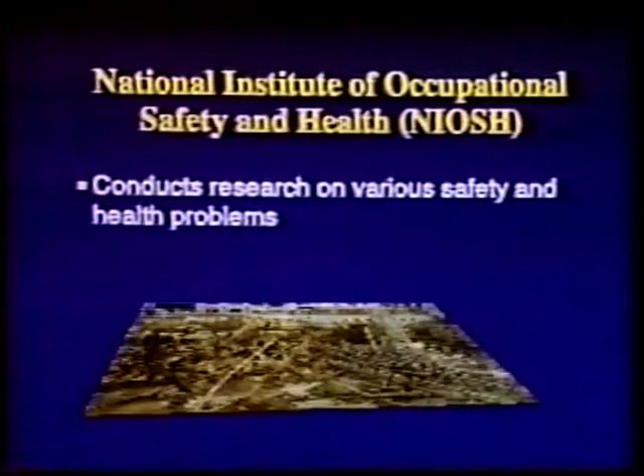The National Institute of Occupational Safety and Health, NIOSH, conducts research on various safety and health problems, provides technical assistance to OSHA, and recommends standards for OSHA's adoption.

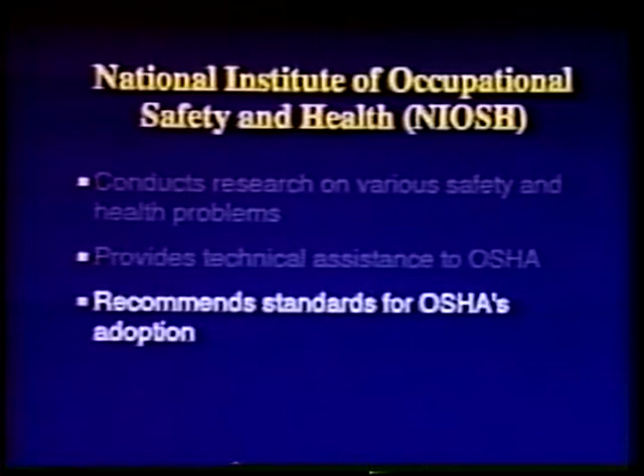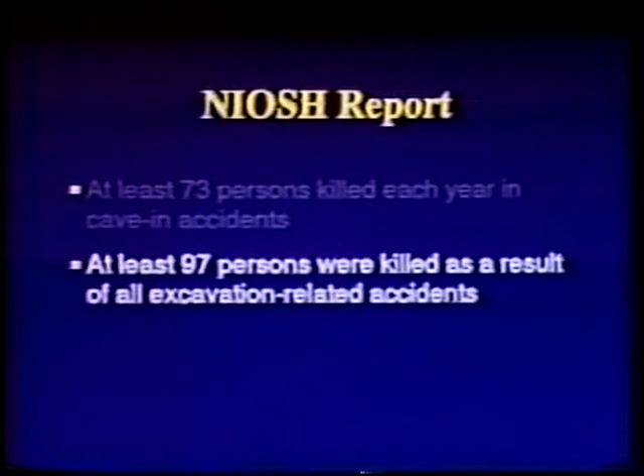In a recent report prepared by NIOSH based on OSHA's inspection data, it was estimated that at least 73 persons were killed each year in cave-in accidents, and at least 97 persons were killed as a result of all excavation-related accidents. This program presents an overview of OSHA's requirements for protection of employees in excavations.

OSHA's excavation standard is contained in its Code of Federal Regulations for the Construction Industry, 29 CFR, Part 1926. The standards found in Subpart P consist of 3 sections.

Section 1926-650 contains the scope, application, and definitions applicable to Subpart P. Section 1926-651 contains general requirements, and Section 1926-652 contains requirements for protective systems. There are also 6 appendices, A through F.

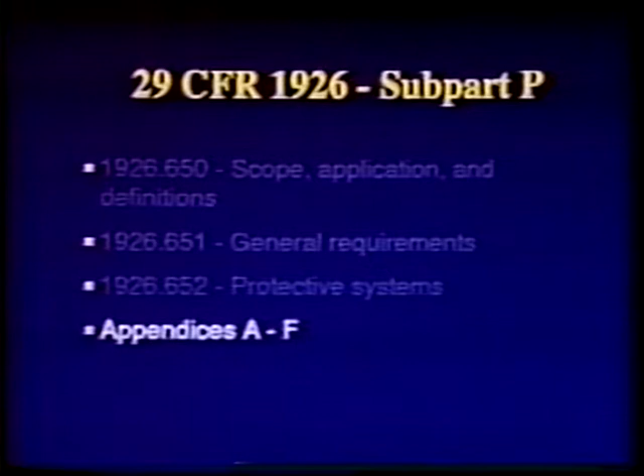OSHA's excavation standard defines excavations to include trenches. The standard states that, in general, the depth of the trench is greater than the width, but the width of the trench, measured at the bottom, is not greater than 15 feet.

OSHA Standard 29 CFR 1926-651 contains requirements for the protection of employees against several different types of hazards of excavation-related work. Let's look at some of these.

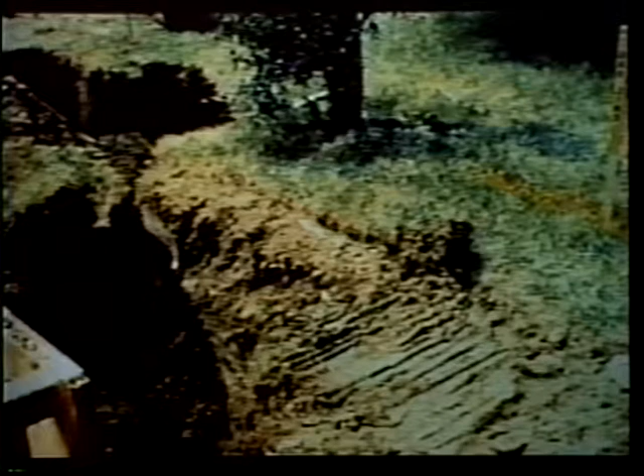All surface encumbrances such as trees or boulders that are located so as to create a hazard must be removed or supported to safeguard workers.

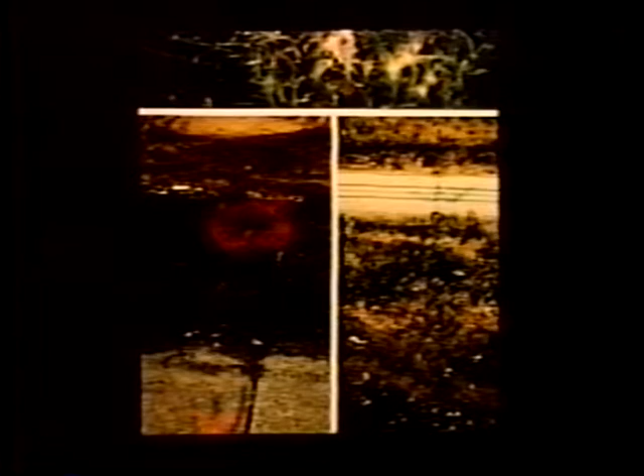The estimated location of utility installations such as sewer, water, fuel, and electric lines, or any other underground installations that may reasonably be met with during excavation work, are to be determined prior to opening the ground. Prior to start of actual operations, the utility companies or owners are to be advised of the proposed work and asked to establish the underground installation's actual location.

When the utility or owner cannot establish exact locations or respond in a timely manner, the contractor may proceed with caution. Detection equipment or other acceptable means to locate utility installations must be used.

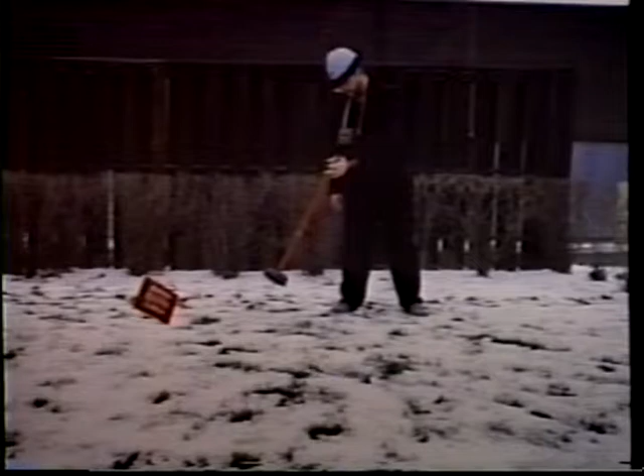When excavation work nears the estimated location of the installations, the exact location is to be found by safe and acceptable means. While the excavation is open, underground installations must be protected, supported, or removed as necessary to safeguard employees.

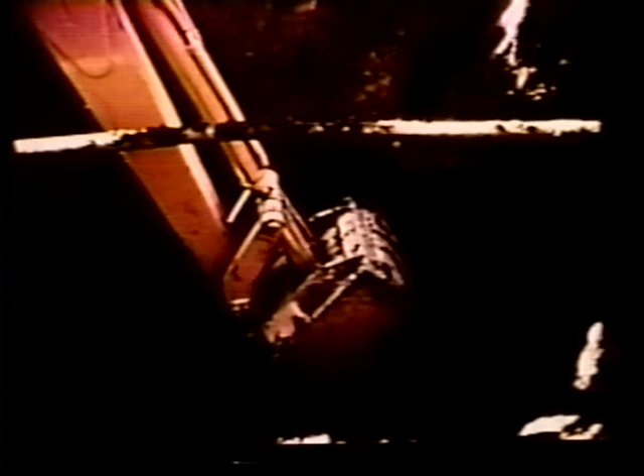Flooding, shock, asphyxiation, electrocution, fire, explosion, and collapse of undermined installations are some of the hazards that result when underground installations are damaged.

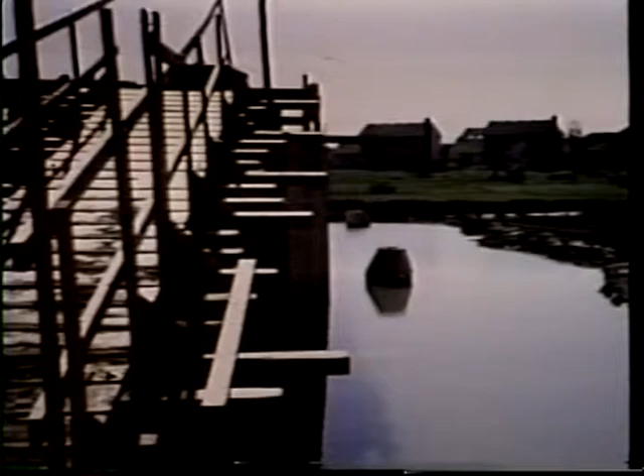Structural ramps must be designed and constructed to meet the requirements of their usage. Safe means of entering and leaving excavations must be provided for workers.

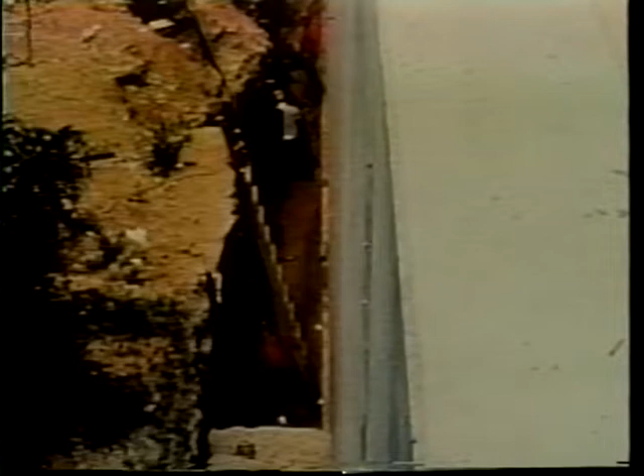A stairway, ladder, ramp, or other safe means of egress must be located in trench excavations 4 feet or more in depth so as to require no more than 25 feet of lateral travel. This is to allow workers to get out quickly in the event of an emergency.

Employees exposed to public vehicular traffic shall be provided with and must wear warning vests or other suitable garments marked with or made of reflectorized or high visibility material.

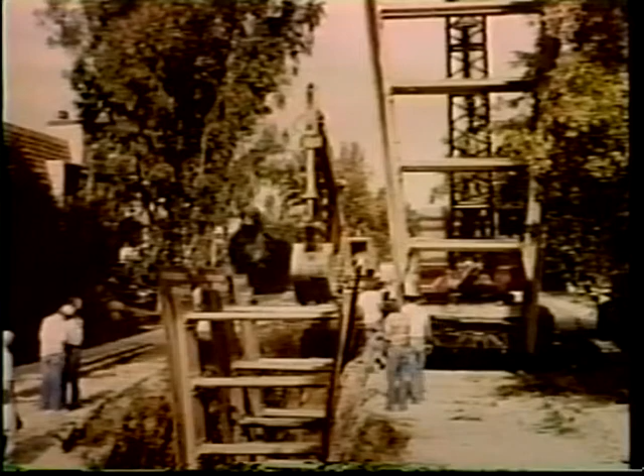Employees are not allowed under loads handled by lifting or digging equipment. Employees must stand away from vehicles being loaded or unloaded to avoid being struck by spillage or falling materials.

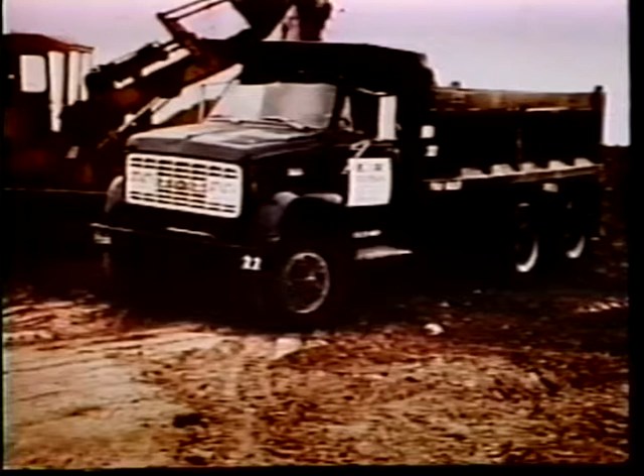Operators may remain in the cabs of vehicles being loaded or unloaded when the vehicles are equipped to provide adequate protection for the operator during these operations.

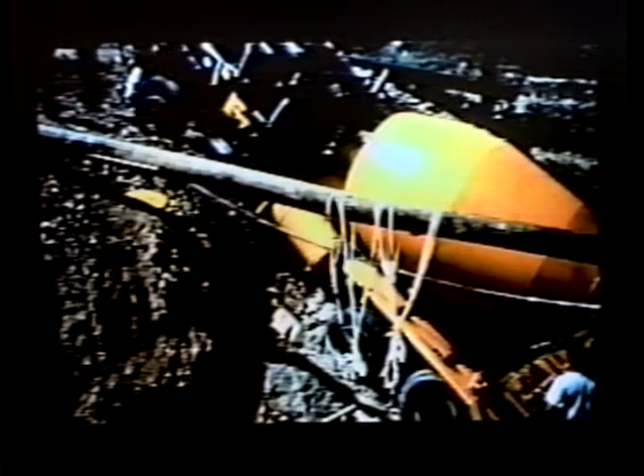When mobile equipment is operated next to an excavation, or when it must approach the edge of an excavation and the operator does not have a clear, direct view of the edge, a warning system must be used. This system may involve barricades, stop logs, or signals.

To prevent exposure to harmful levels of air contaminants and to assure acceptable atmospheric conditions, certain requirements must be met. Under certain conditions, atmospheres of excavations greater than 4 feet deep must be tested before employees may enter. Testing is required where oxygen deficiency, that is less than 19.5% oxygen, or a hazardous atmosphere exists or could reasonably be expected to exist.

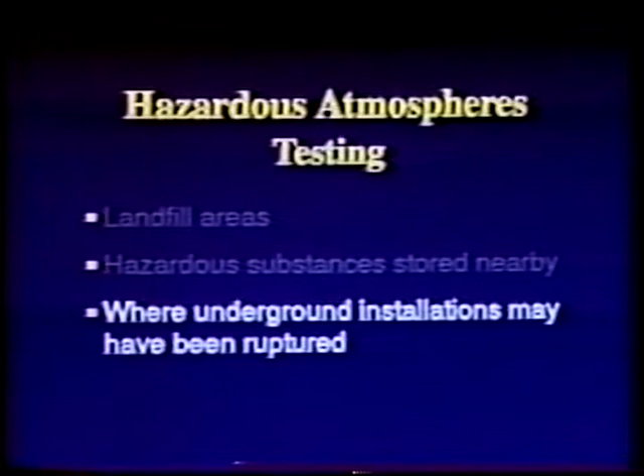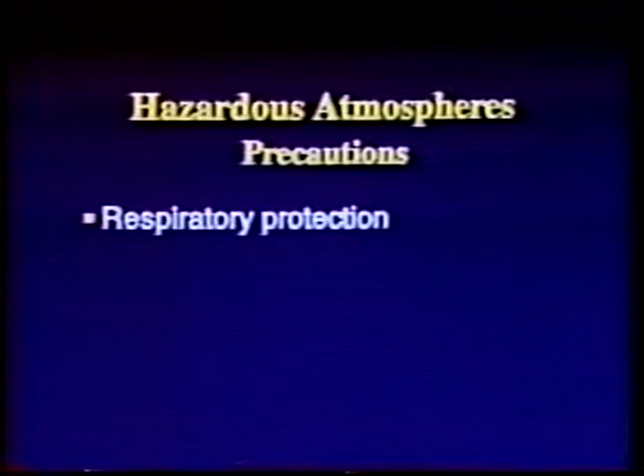Examples of these conditions include excavations in landfill areas, where hazardous substances are stored nearby, or where underground installations may have been ruptured. Adequate precautions shall be taken to prevent employee exposure to atmospheres containing less than 19.5% oxygen and other hazardous atmospheres. These precautions include providing proper respiratory protection or ventilation.

When controls such as ventilation are used to reduce the level of atmospheric contaminants to an acceptable level, testing is to be conducted as often as necessary to ensure continuing safety.

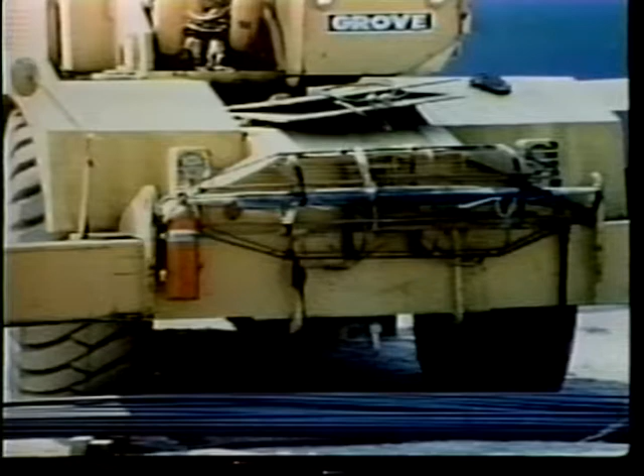Emergency rescue equipment, such as breathing apparatus, a safety harness and line, or a basket stretcher, must be readily available where hazardous atmospheric conditions exist or can reasonably be expected to develop. This equipment must be attended when in use.

Employees entering deep and confined footing excavations are to wear a harness with a securely attached lifeline. The lifeline is to be separate from any line used to handle materials and is to be individually attended at all times while the employee wearing the lifeline is in the excavation.

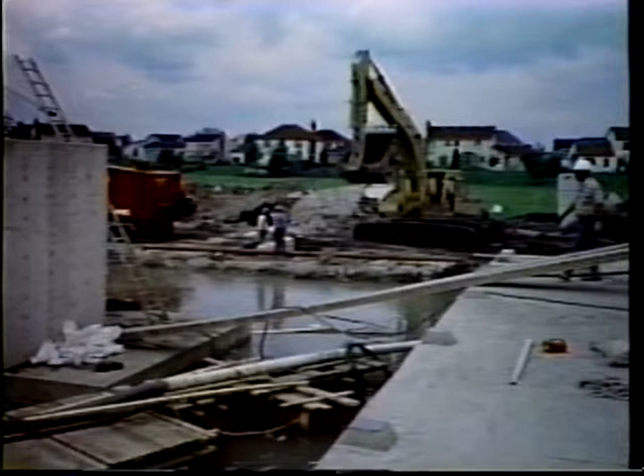Water is very likely to be present during the course of work in many excavations and is one of the major concerns during excavation operations. The action of water against the sides of excavations can cause undermining and cave-ins. The presence of accumulated water in or around excavations must, therefore, be treated with caution.

Employees shall not be permitted to work in excavations where water has accumulated or is accumulating unless adequate precautions have been taken to protect them. Necessary precautions vary with each situation, but could include special support or shield systems or water removal.

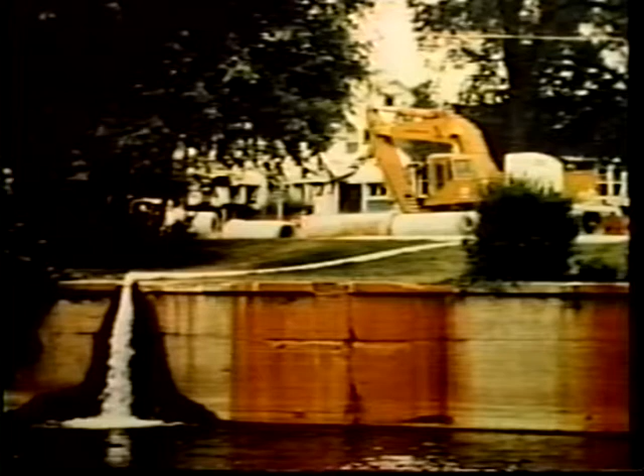If water removal equipment is used, the equipment and its operation must be monitored by a competent person to assure continued proper operation. If excavation work interrupts the natural drainage of surface water, diversion ditches, dikes, or other means must be used to prevent surface water from entering the excavation and to provide safe drainage of the adjacent area.

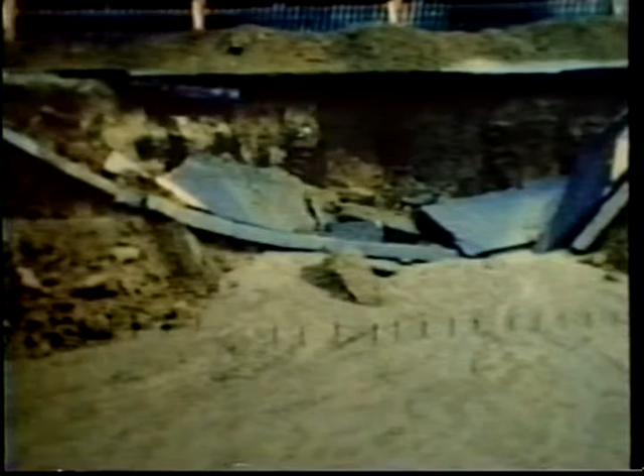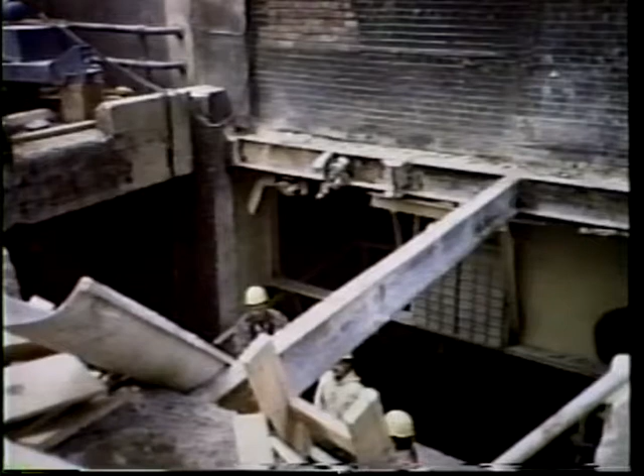Workers may also face hazards where the stability of adjacent buildings, walls, or other structures is endangered by excavation operations. Support systems such as shoring, bracing, or underpinning must be provided to ensure the stability of such structures for the protection of employees. Excavation below the level of the base or footing of any foundation or retaining wall that could be reasonably expected to pose a hazard to employees is not permitted.

Except when the excavation is entirely in stable rock, or a support system such as underpinning is provided to ensure employee safety and stability of the structure, or a registered professional engineer (PE) has approved the determination that the structure is far enough away not to be affected by excavation activity, or that such excavation work will not pose a hazard to employees.

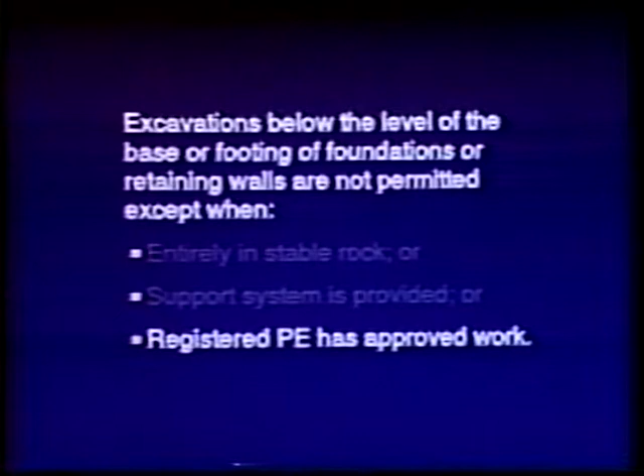Sidewalks, pavements, and appurtenant structures may not be undermined unless a support system or another method of protection is provided to protect employees from possible collapse.

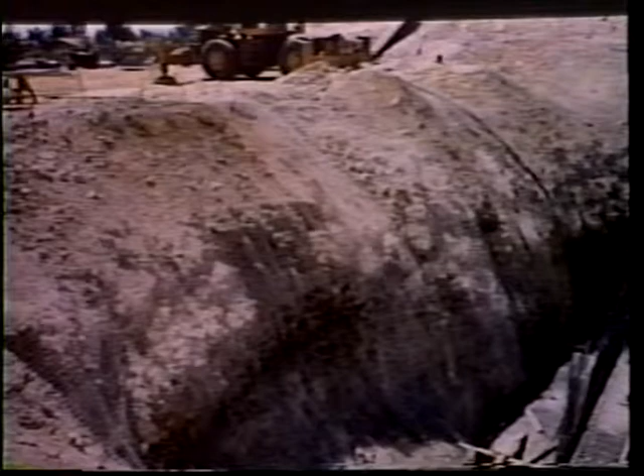Employees must be protected from loose rock or soil, which might create a hazard by falling or rolling from the excavation face. Materials and/or machines may become hazardous if measures aren't taken to keep them from sliding or falling into an excavation where employees are working.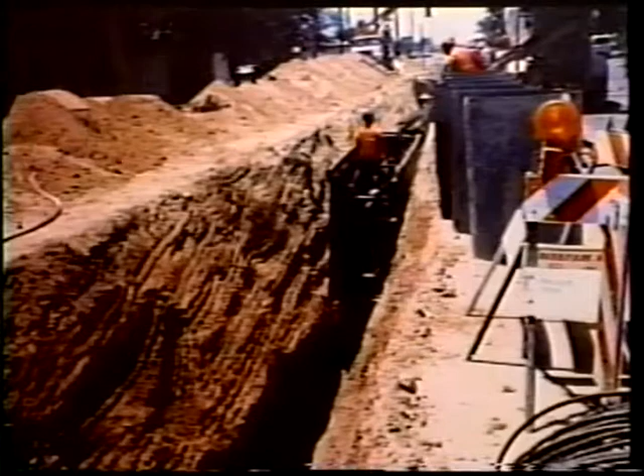Protection of employees from materials or equipment which could fall or roll into an excavation shall be provided by keeping them at least 2 feet from the edge of excavations, or by the use of adequate retaining devices, or by a combination of both if necessary.

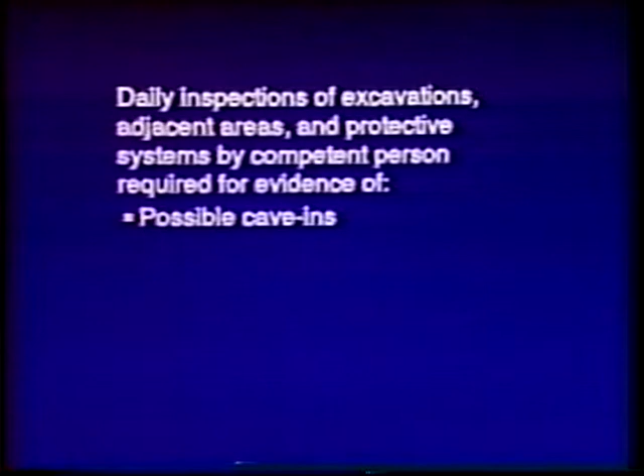Daily inspections of excavations, the adjacent areas, and protective systems must be made by a competent person for evidence of a situation that could result in possible cave-ins, failure of protective systems, hazardous atmospheres, or other hazardous conditions.

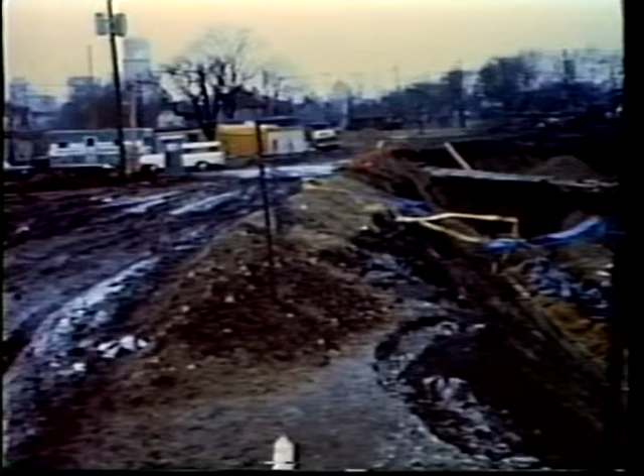Excavations subject to heavy rain runoff are to be inspected by a competent person and, as necessary, precautions instituted to protect against the hazard. Inspection shall be made after every rainstorm or other hazard-increasing occurrence.

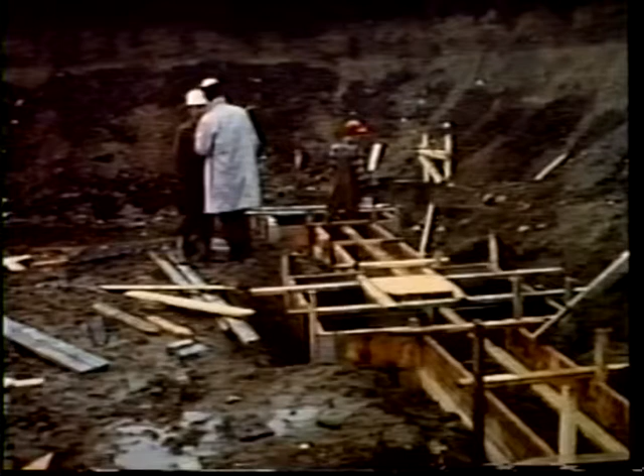The competent person shall make inspections prior to the start of work and as needed throughout the shift, as well as after every rainstorm or other hazard-increasing occurrence. These inspections are only required when employee exposure can be reasonably anticipated.

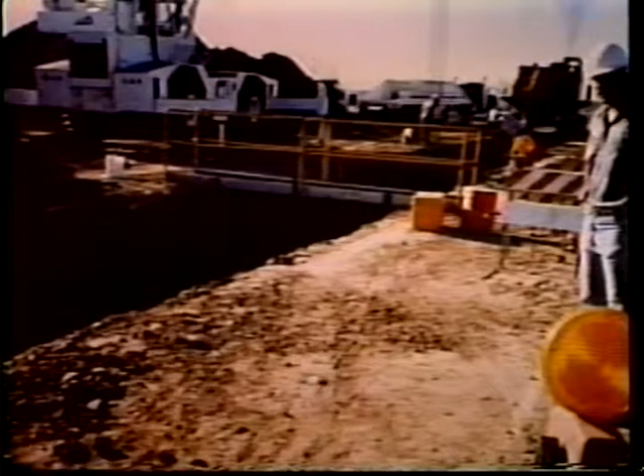Where employees or equipment are required or permitted to cross over excavations, walkways or bridges with standard guardrails must be provided.

Excavation safety requires pre-planning. Let's take a look at some other areas where anticipation of possible hazards can help avoid accidents and injuries.

OSHA Standard 29 CFR 1926.652 contains requirements for the protection of employees from cave-ins through the use of protective systems. OSHA requires that each employee in an excavation be protected from cave-ins by a protective system, except when excavations are made entirely in stable rock, or excavations are less than 5 feet in depth and determined by a competent person to show no indication of potential cave-in.

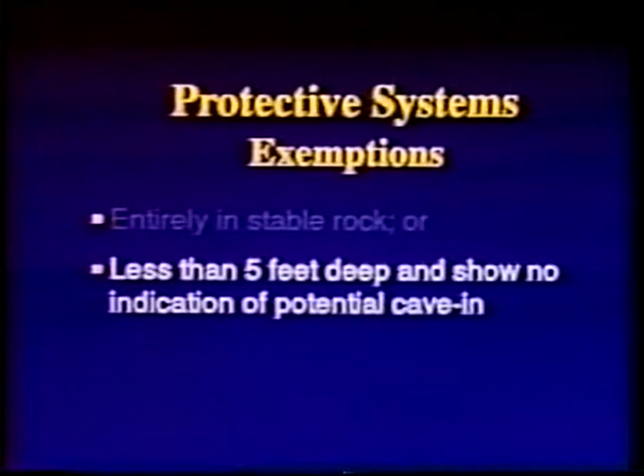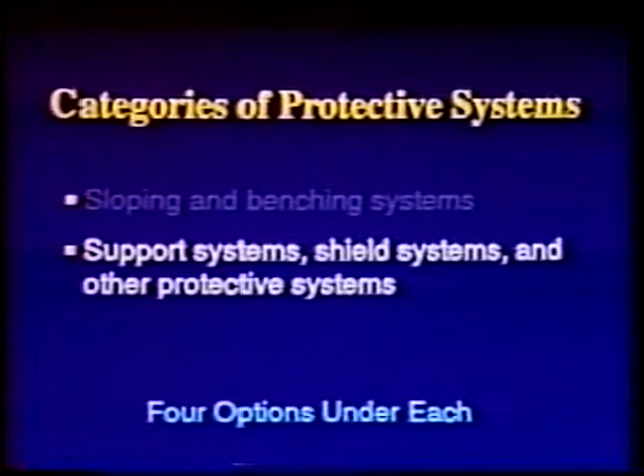OSHA divides protective systems into two categories: sloping and benching systems, and support systems, shield systems, and other protective systems. The use of either of these categories of protective systems requires the choice of one of 4 design options.

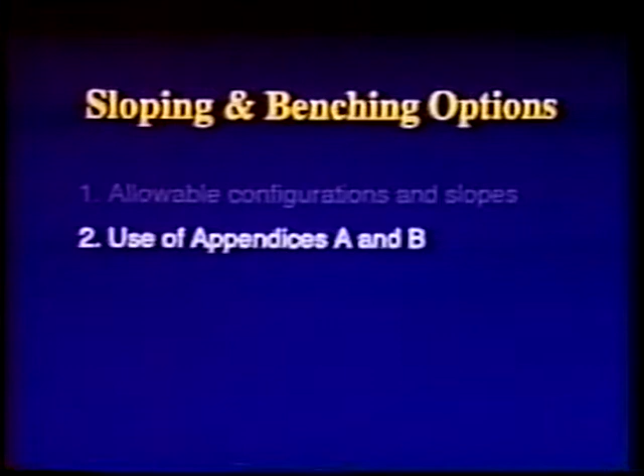Let's first look at the allowable options when choosing sloping and benching systems. The options include allowable configurations and slopes, the use of Appendices A and B, designs using other tabulated data, and design by a registered professional engineer.

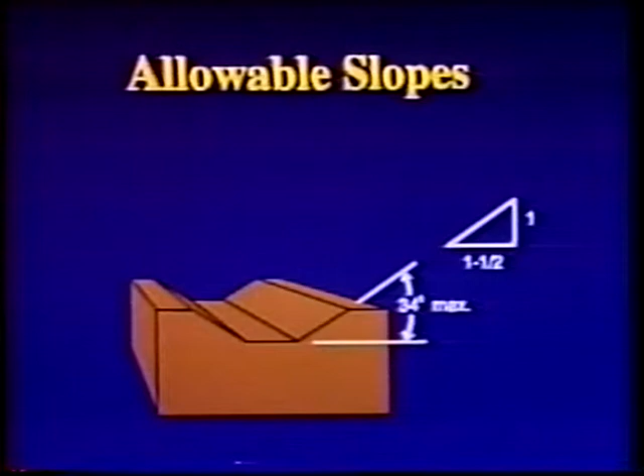The first option specifies allowable configurations and slopes. Any excavation less than 20 feet in depth may be sloped at an angle not steeper than 1 1/2 horizontal to 1 vertical, 34 degrees measured from the horizontal. Such slopes meet OSHA's requirements for worst-case soils, Type C, as defined in 29 CFR 1926, Subpart P, Appendix A.

The second option involves the use of Appendices A and B. Maximum allowable slopes and allowable configurations for sloping and benching systems are set forth in Appendices A and B.

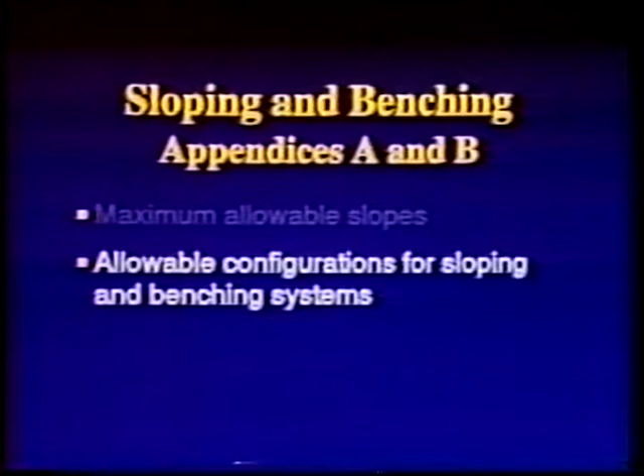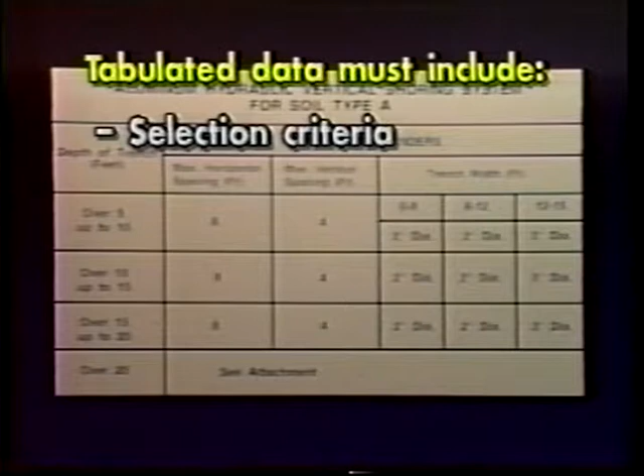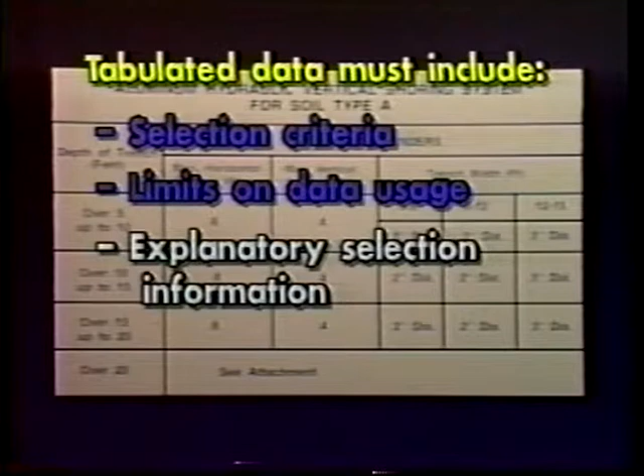The third option, when choosing sloping and benching systems, involves the use of tabulated data, such as tables and charts. The tabulated data must be in written form and include selection criteria, limits on data usage to include the magnitude and configuration of slopes determined to be safe, explanatory information necessary to aid the user to make correct selection of protective systems, and the identity of the registered PE who approved the data.

At least one copy of this data must be kept at the job site during construction of the protective system. The fourth option involves the design by a registered professional engineer. Designs must be in written form and must include the magnitudes and configurations of slopes and benches determined to be safe for the project, as well as the identity of the approving PE.

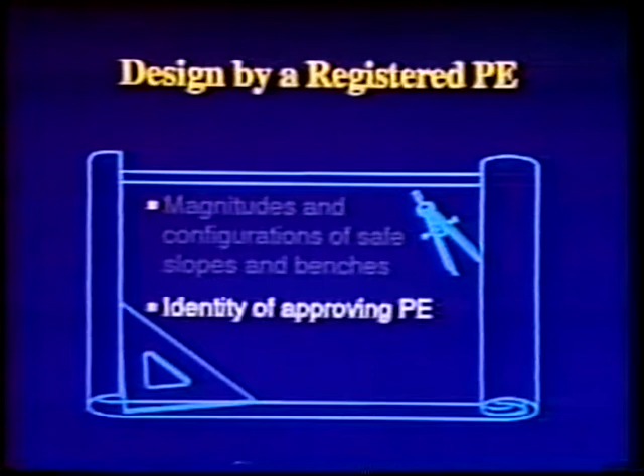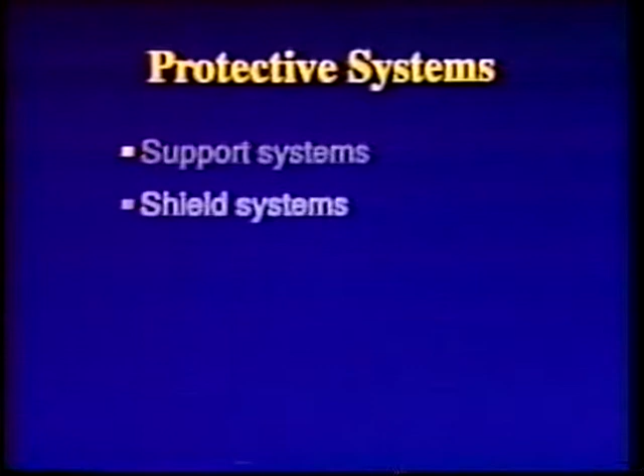The second category of protective system prescribed by OSHA to protect employees from cave-ins involves the use of support systems, shield systems, and other protective systems. The use of this category also requires the choice of one of 4 design options.

The first option is to use Appendices A and C or D. For timber shoring in trenches, Appendix A, soil classification, and Appendix C, timber shoring, are to be used. Hydraulic shoring of trenches calls for use of either Option 2, manufacturer's tabulated data, or Appendix D, aluminum hydraulic shoring. Appendix D is to be used when manufacturer's tabulated data are not available.

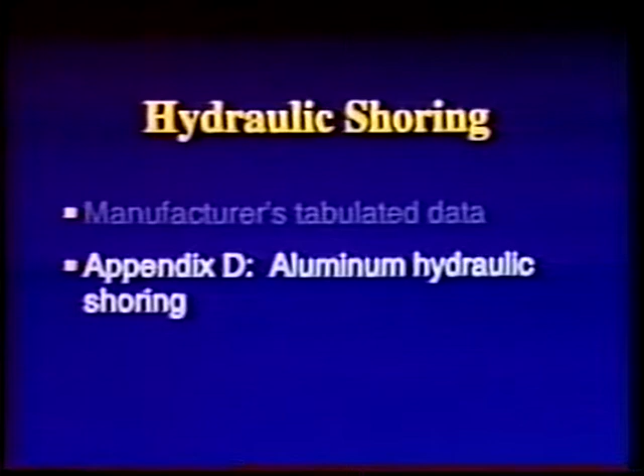The second option is to use manufacturer's tabulated data. Design of support, shield, or other protective systems using these data must agree with all specifications, recommendations, and the limitations issued or made by the manufacturer. Deviations are allowed only with the manufacturer's specific written approval. These data are to be in written form and kept at the job site during construction of the protective system.

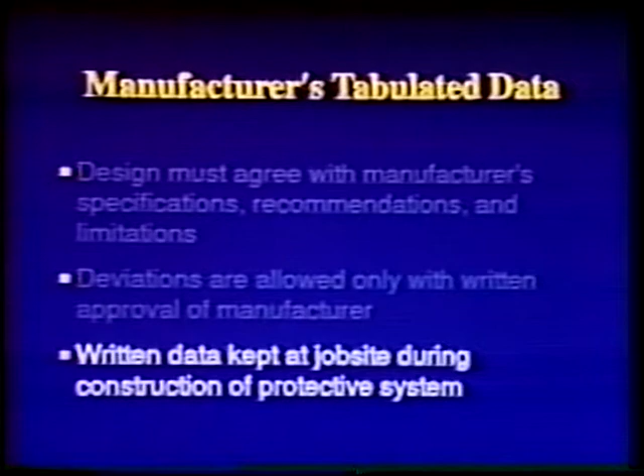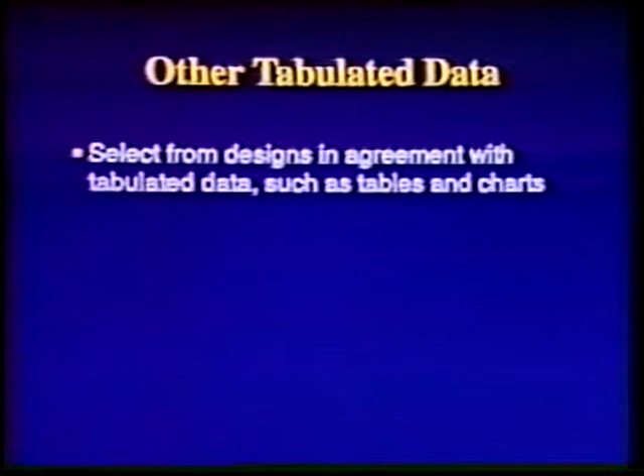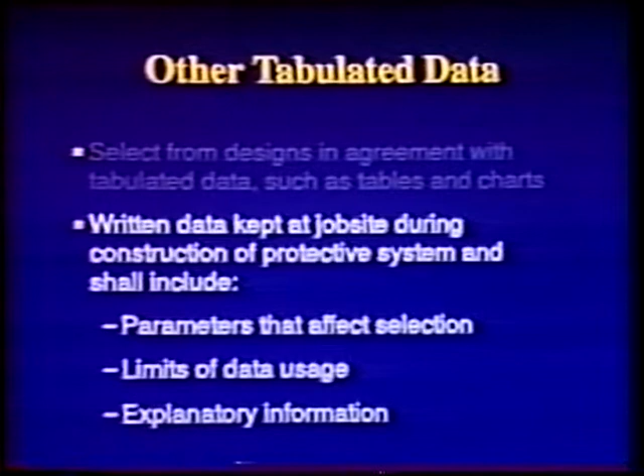The third option when choosing the use of support, shield, or other protective systems is design using other tabulated data. The contractor may select from designs in agreement with tabulated data, such as tables and charts approved by a registered professional engineer. The written data are to be kept at the job site during construction of the protective system and shall include the parameters that affect system selection, the limits of data usage, and any explanatory information necessary to make the correct system selection. The fourth option is to use a design approved by a registered professional engineer.

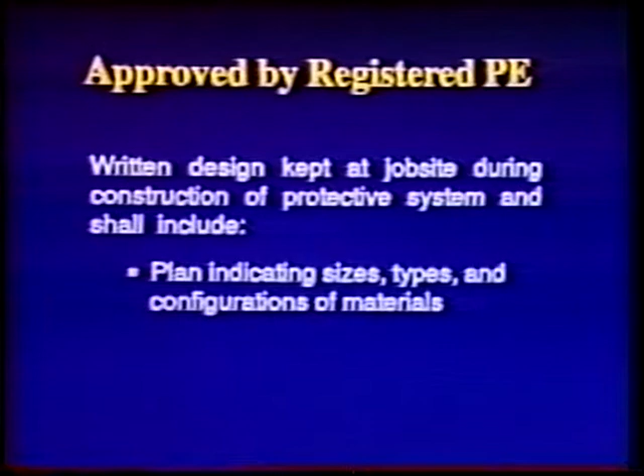Such designs are to be written, kept at the job site during construction of the protective system, and include a plan indicating the size, types, and configuration of the materials to be used, and the identity of the approving registered PE. Materials and equipment used for protective systems must be free from damage or defects that might impair their proper function.

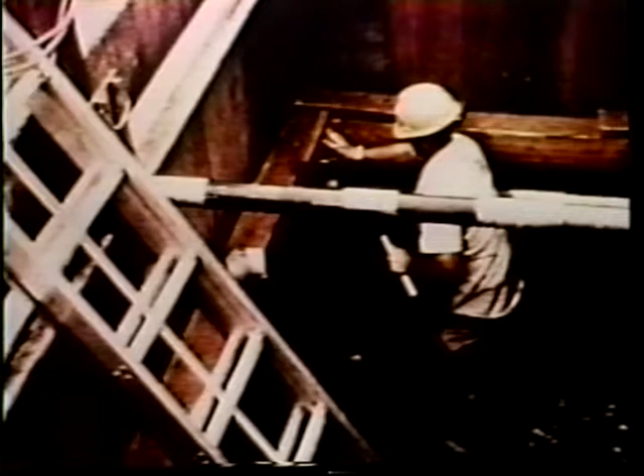A competent person shall examine damaged material or equipment to evaluate its suitability for continued use. Material or equipment found unsafe for continued use shall be removed from service. Members of support systems are to be securely connected to prevent sliding, falling, kickouts, or other predictable failures. Support systems must be installed and removed in a way which protects employees from cave-ins, structural collapses, or from being struck by system members.

Installation should begin at the top and progress to the bottom of the excavation. Removal reverses this process. Installation of support systems is to be closely coordinated with the excavation of trenches. Backfilling shall progress together with the removal of support systems.

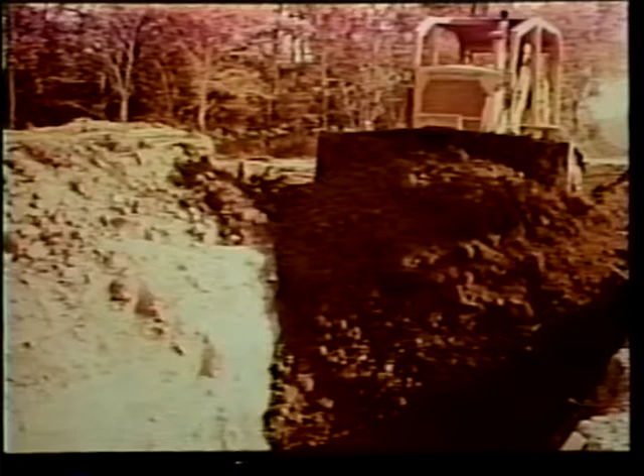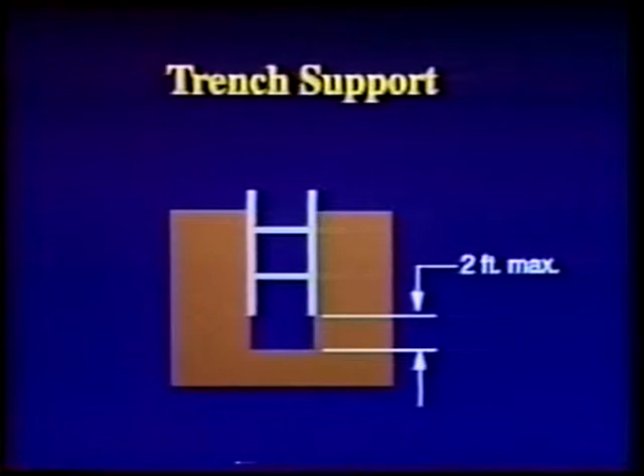Material may be dug to a level no more than 2 feet below the bottom members of a support system if the system is designed to resist the forces calculated to the full depth of the trench, and there is no indication of soil loss from behind or below the bottom of the support system. This allowance for 2 free feet also applies to trench shields.

Employees may not work on the faces of slopes or benches above other workers unless the workers at the lower level are protected from the hazard of falling, rolling, or sliding material or equipment.

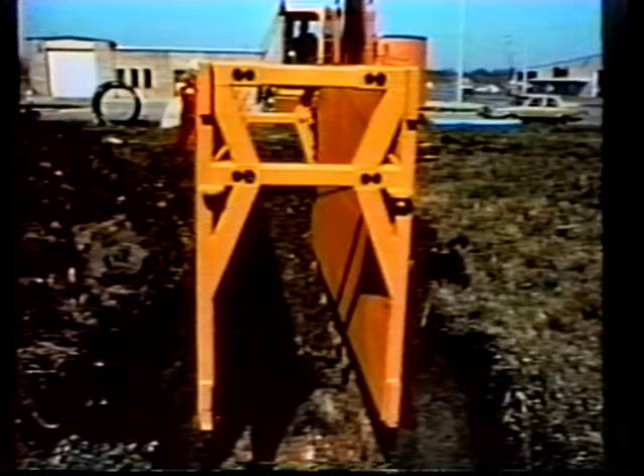Shields shall be installed in a way that will restrict lateral or other hazardous movement of the shield in the event of sudden lateral pressures. Employees are not to be in shields when they are being installed, removed, or moved vertically. Employees may remain inside shields being moved horizontally.

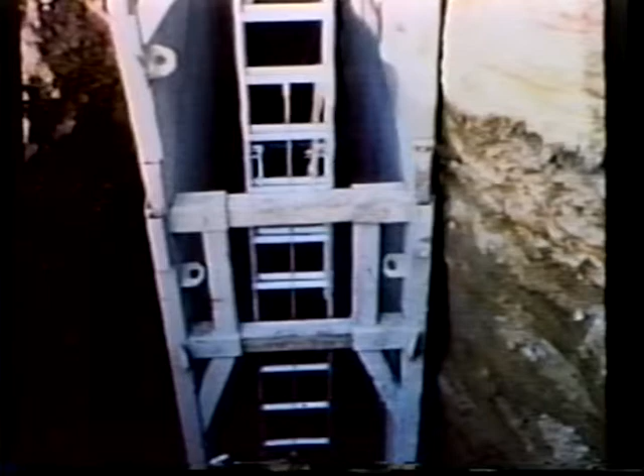Employees are also to be protected from the hazards of cave-ins when they're entering or leaving the areas protected by the shield. Contractors who choose to use the appendices of OSHA's excavation standard in design and construction of a protective system must thereafter treat the provisions of the selected appendices as mandatory.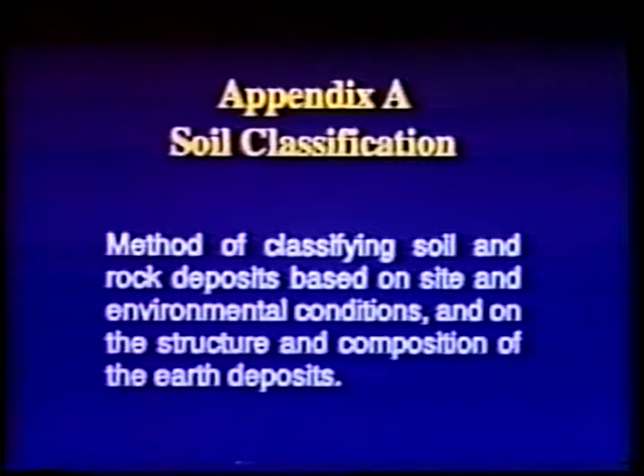Appendix A describes a method of classifying soil and rock deposits based on site and environmental conditions and on the structure and composition of the earth deposits. The appendix contains definitions, sets forth requirements, and describes acceptable visual and manual tests for use in classifying soils.

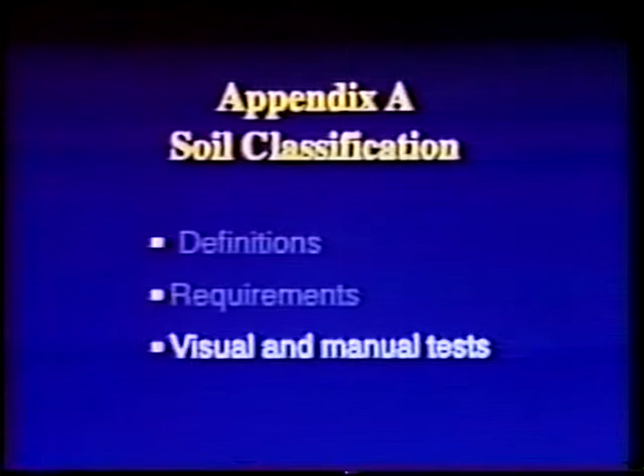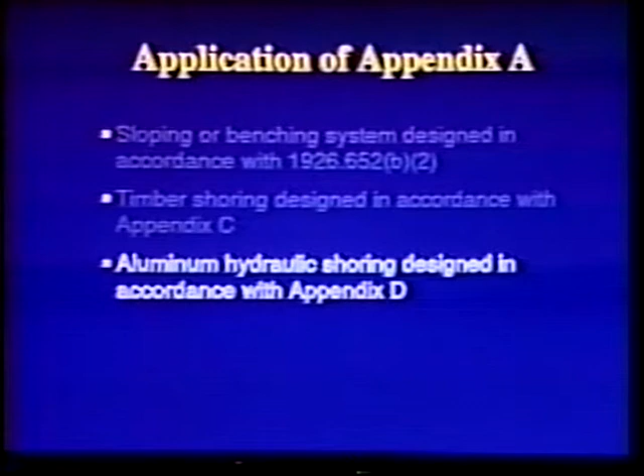This appendix applies when a sloping or benching system designed in accordance with the requirements of 1926.652(b)(2) is chosen, when timber shoring for excavations is designed in accordance with Appendix C of Subpart P, or when aluminum hydraulic shoring is designed in accordance with Appendix D.

Appendix A also applies if other protective systems are designed and selected for use from data prepared in accordance with requirements set forth in 1926.652(c), and the use of the data is based on use of the soil classification system presented in Appendix A.

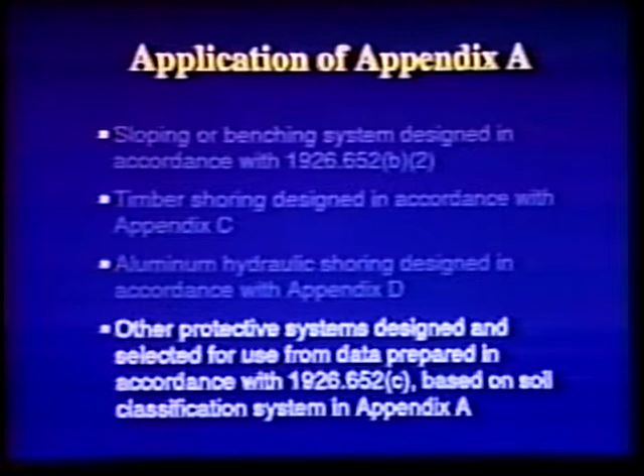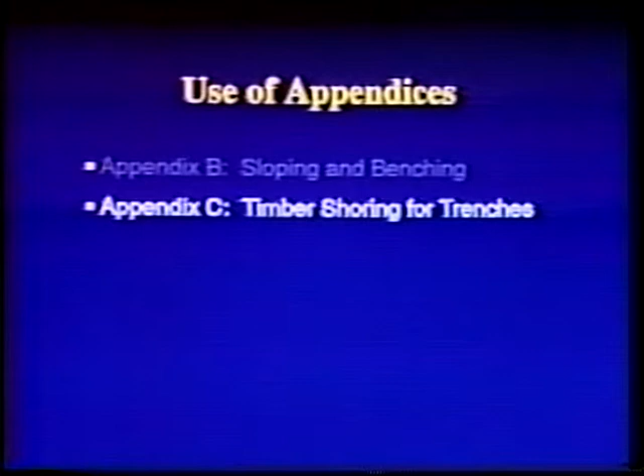To restate, use of Appendix B, sloping and benching, Appendix C, timber shoring for trenches, or Appendix D, aluminum hydraulic shoring for trenches, all require the use of Appendix A, soil classification. Indeed, any protective system based on the use of the soil classification system presented in Appendix A must meet all the requirements of that appendix.

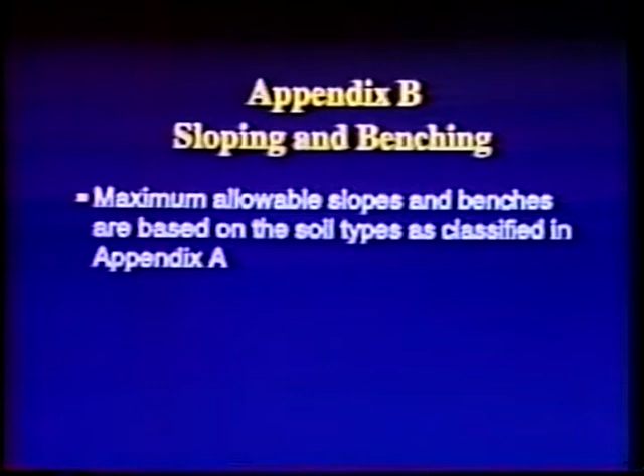Appendix B contains specifications for sloping and benching when used to protect employees from cave-ins. Maximum allowable slopes and benches are based on the soil types as classified in Appendix A and are found in tables B1 through B14. Appendix C contains information to be used when timber shoring is provided as a method of protection from cave-ins in trenches not more than 20 feet deep.

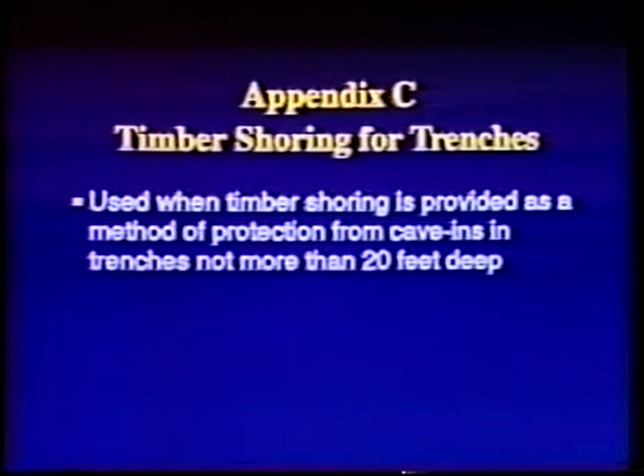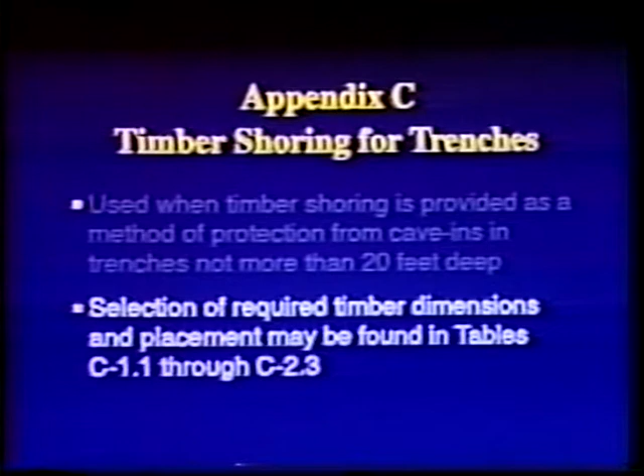Selection of required timber dimensions and placement may be found in tables C-1.1 through C-2.3. Each table presents the minimum sizes of timber members to use in a shoring system. Tables C-1.1 through C-1.3 are for actual size. Tables C-2.1 through C-2.3 are for nominal size.

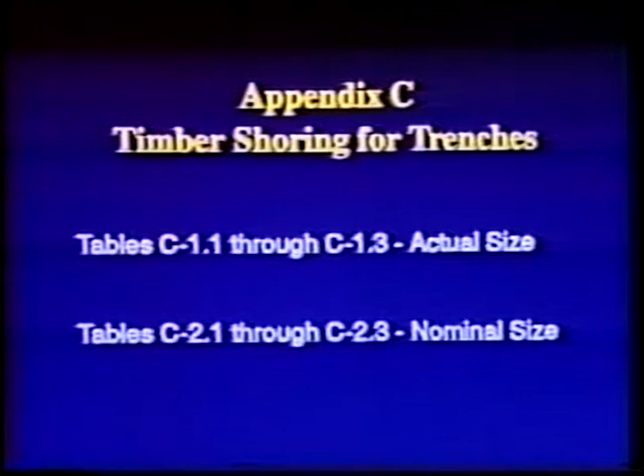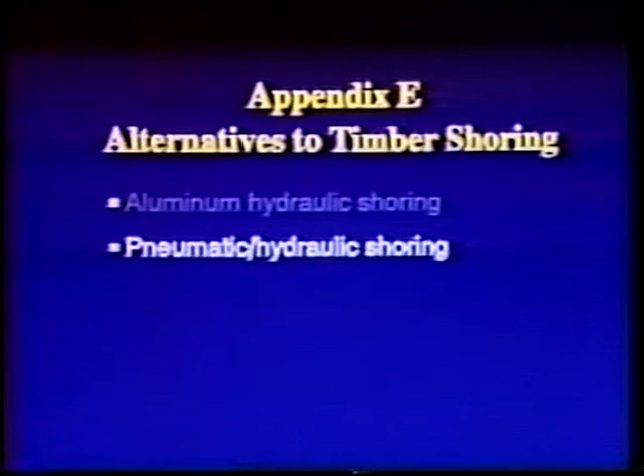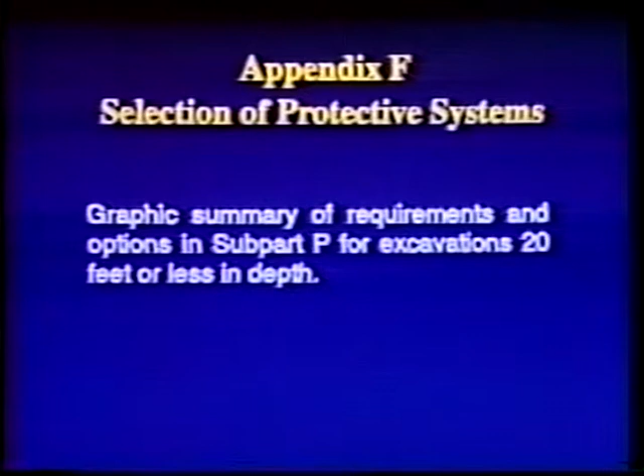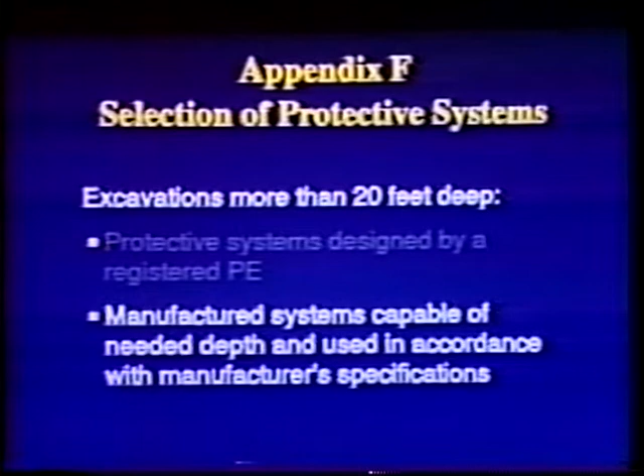Appendix E illustrates alternatives to timber shoring such as aluminum hydraulic shoring, pneumatic hydraulic shoring, trench jacks, and trench shields. Appendix F presents a graphic summary of the requirements and options in Subpart P for excavations 20 feet or less in depth. Deeper excavations require protective systems designed by a registered professional engineer or manufactured systems capable of the needed depth and used in accordance with manufacturer specifications.

This program has presented an overview of OSHA's requirements for protection of employees in excavations. Strict adherence to these regulations can substantially reduce the number and severity of accidents resulting from excavation work.